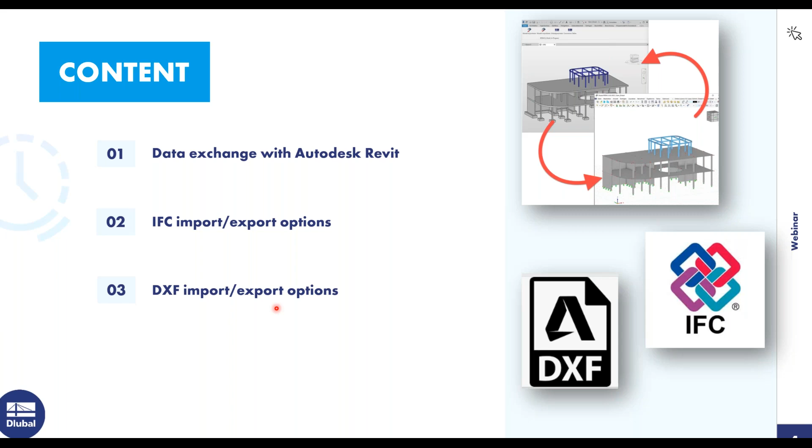So like I said, I would like to start with Revit, but before that, I want to have a closer look at the objects that you can transfer and just some general information on the integration.

Currently we have the interface for Revit 2022, and we're working on Revit 2023. This is planned to be released this month, actually. Both of these releases are set as our named work-in-progress versions, meaning we haven't fully developed all of the features that we want to have yet, but the most important features like the import/export are working for the first release.

The interface itself is still a direct interface, and this is based on web services. So keep in mind, Revit and RFEM must be installed on the same PC, similar to the past. The installation is a little bit different this time, it's a manual installation. Once you install Revit and RFEM on your PC, you'll want to navigate to this folder shown here, and then run this .exe file to install the direct interface.

Currently, this link/transfer requires a web services license, and we plan to make this free in the future. For now, though, if you want to test this out, feel free to get into contact with us, and we will assign you a free web service license to test.

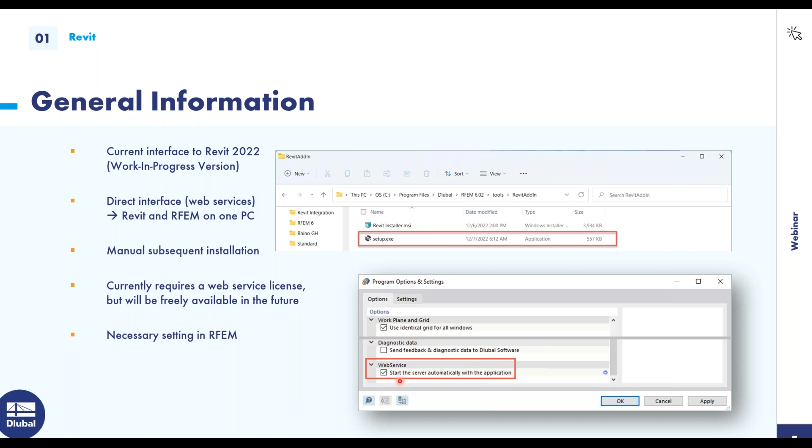Before we go over the interface itself, I wanted to show you the objects in the list here that can be transferred from Revit to RFEM. Some standout ones, for example, are walls and slabs, along with columns and girders (so beams), and then materials and cross sections can be transferred over along with openings. Basically, these objects are all related to the analytical model data.

At the moment, we are lacking or missing some features like loading. So loads we don't have at the moment, they cannot be transferred over yet, but they are under development and should be released soon.

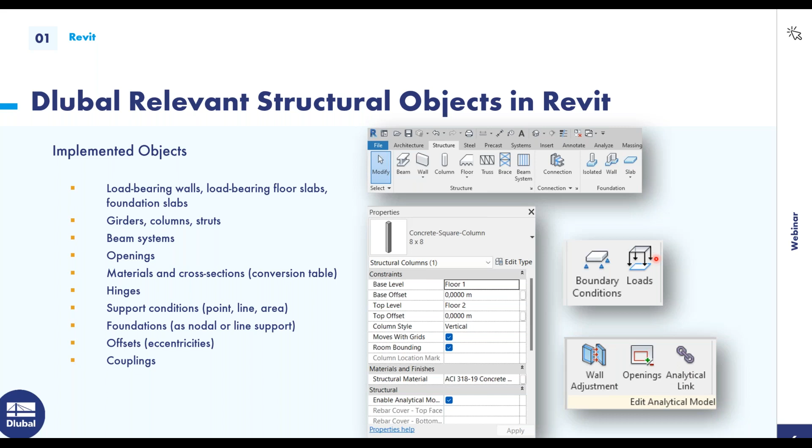Next, I wanted to go over the settings regarding the export. So we can go over those here in the PowerPoint.

The first setting you'll see in this export dialog box is that you can determine the direction of the global z-axis. You can choose to have this set upwards or downwards in RFEM. And then we have some exporting options here.

The first option here is to create a new structure. What this will do is create a whole new blank file in RFEM.

Then you can also choose to overwrite an existing structure, and this will completely delete the structure in RFEM and overwrite it with the structure from Revit.

And lastly, we have update existing structure, and this will just update the items or objects that you've changed in Revit and RFEM. So for example, let's say you first export from Revit to RFEM, and then you modify the structure in RFEM, and then maybe at some point the Revit model gets updated. With this update existing structure option, you can simply update the RFEM model, and there's no need to start all over in RFEM, and then you can save that.

Then there's an additional option here: you can overwrite the member releases, but by default we have this turned off. The reason is because we believe the RFEM hinges or member releases have a higher priority. By default we believe you don't want to overwrite these, simply because we have more options for hinges in RFEM, for example nonlinearities.

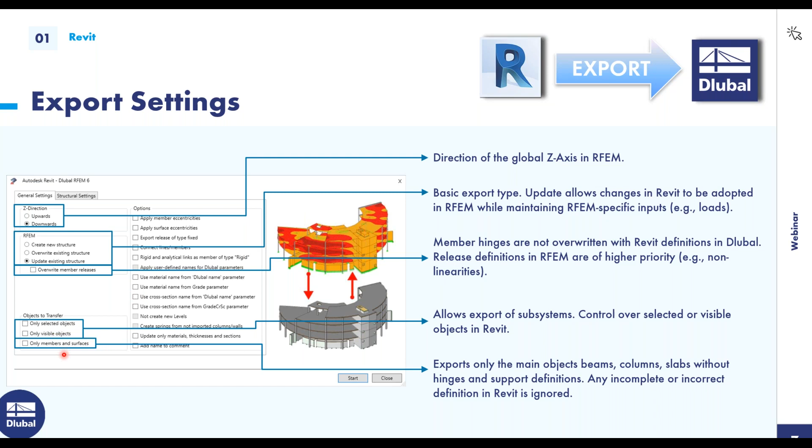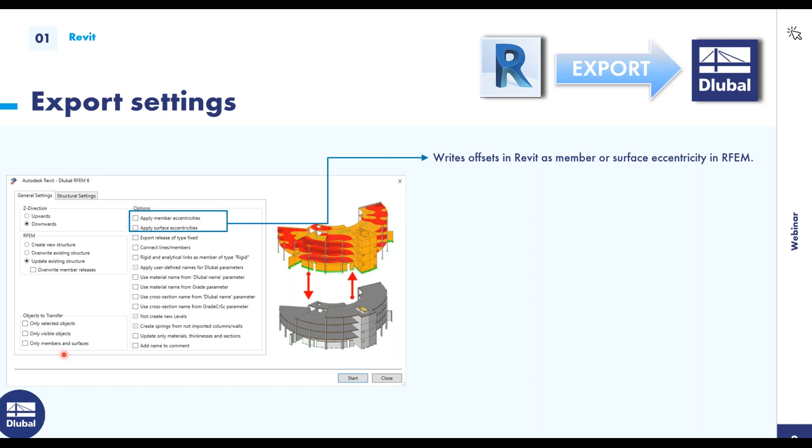Then some more additional options on the right-hand side here. You can choose whether to export member eccentricities or surface eccentricities. Eccentricities are some calculated distance between the analytical line of a beam or slab, and that distance is to the center of gravity of the physical object. So that's what an eccentricity would be in RFEM.

There are some additional options here that I'm not going to go over live today, but feel free to check out the PDF located in the handouts of this webinar, or the recording online, to read through these. The yellow highlighted options are still a work in progress and are not implemented yet.

And then this add name to comment option - basically when you export, the material and cross-section names will be automatically placed in the comments of any element in RFEM.

And then there is a second tab called Structural Settings, and this is the last tab in the export settings. Basically what this does is it allows you to convert isolated foundations into nodal or line supports, or surfaces with elastic foundations. So this will turn your isolated foundations or wall foundations into either nodal supports, line supports, or surfaces with elastic foundations.

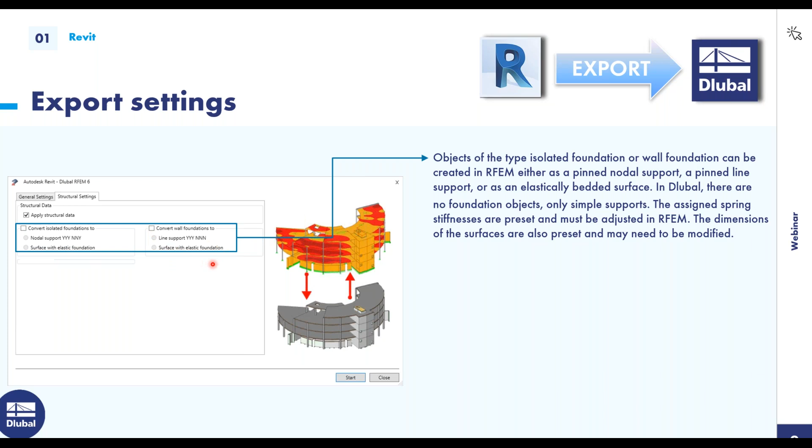Then the next topic is conversion tables. This is a topic that comes up with every exchange between software programs. Materials and section names must be converted between programs because the names don't match up exactly.

With this conversion table, we modified this a bit for RFEM 6 versus RFEM 5. The reason for this is because the conversion tables are now found in Revit itself. You can see this table here shown, and the table is divided between export to RFEM or importing in from RFEM. The left-hand side is for exporting, the right-hand side is for importing.

And then these tables are further divided by material and section. And then they are subdivided further by whether you're using regular expressions or not.

In case you want to use regular expressions, just a little bit of information on these. Regular expressions are like parametric conversions. So for example, instead of mentioning all sections from W shapes, you could write it as a regular expression, and then you don't have to list all of your W shapes - you could simply just write a regular expression for it.

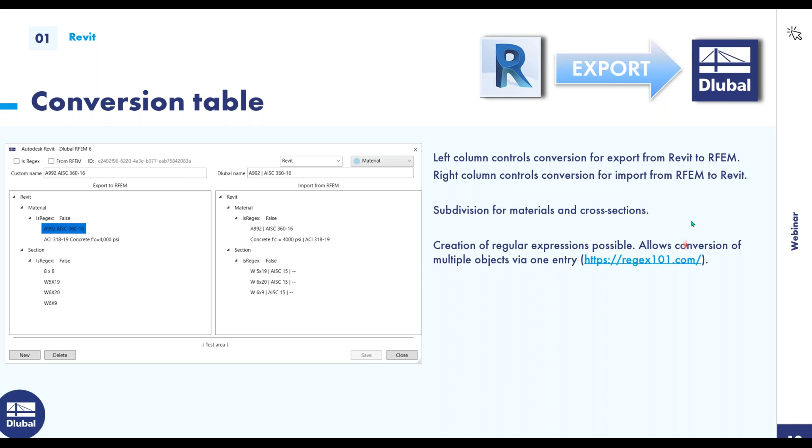The next topic is the Dlubal parameters found in Revit. With this function, you can release or add additional parameters into the analytical properties in Revit. Of the 6 we listed previously, only 2 are currently working. What you can do now is add a parameter for a truss type or tension-only type member into the analytical properties of a column or beam in Revit. This allows you to designate whether a column or beam is a truss or tension member in Revit.

Then during export, this can be read by RFEM and assigned to the corresponding members. In the future, we would like to upgrade this whole feature and give it more attention. We would like to introduce free parameters in Dlubal, which would allow you to assign additional free parameters to beams, surfaces, cross sections, etc. Those parameters could then be shared with Revit, IFC files, or any other application. This isn't implemented yet, but it is planned. So that's the parameters you can use.

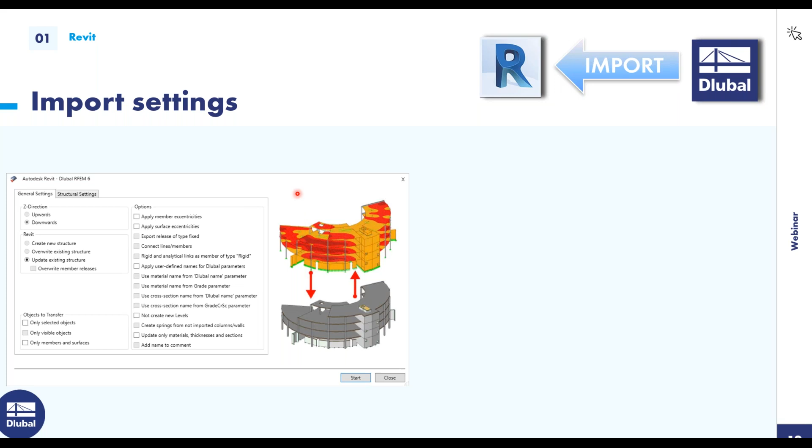The last topic I want to go over before getting into the interface is the import settings. This is the dialog box that pops up if you'd like to import a model from RFEM into Revit, similar to the export settings dialog. We have similar options here. The only option available under the import options is the update existing structure option, so it's only possible to update a Revit project. You cannot overwrite or create a new project.

What this allows you to do is export into RFEM, modify the model there, and then update the Revit project. Another example: you could open an empty Revit project and read all the info in from RFEM or RSTAB, just by updating the project, and you'll get all the information from RFEM or RSTAB. This is only valid if you make sure you have the correct families preloaded into Revit, as we're not able to create new families when importing from RFEM.

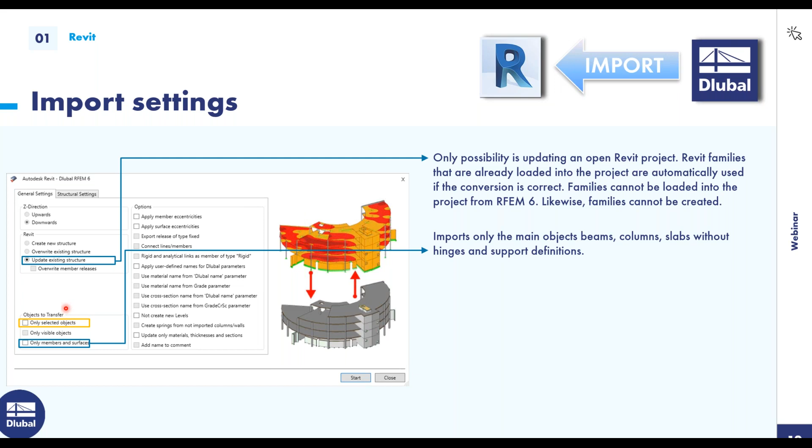There are also some functions for controlling the amount of transfer you do. This would allow you right now to transfer some of the objects. This is still a little under construction, but you do have the option to only transfer members and surfaces if you'd like. We have some other options also under construction, such as eccentricities, which are shown here but not available yet. Of the remaining options, you can check not to create new levels in Revit during the import - that's available. You can also choose to only update materials, thicknesses, and sections, which is sometimes a safer way of updating projects.

That is it regarding the theoretical point of view of the interface. Now I'd like to take a look at the actual interface itself. So what we can do is move over to Revit, and here you should see I have an example open in Revit at the moment.

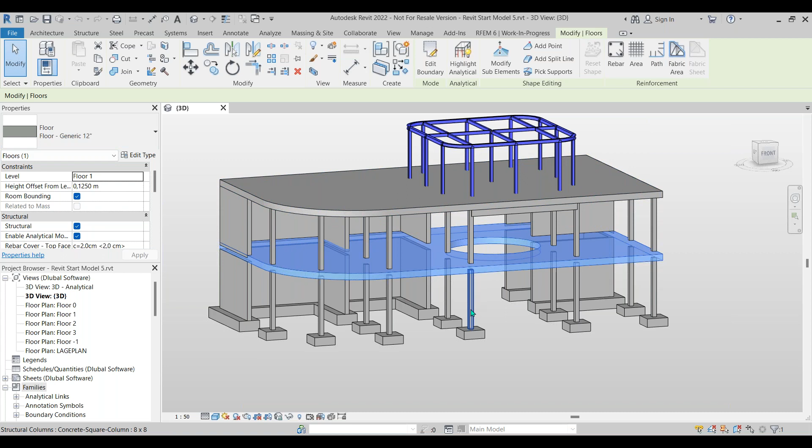This is a project I previously put together. You can see it is a mixed structure of concrete and steel, maybe some small offices. We have concrete walls that are 8 inches, concrete slabs about 12 inches with an opening, and concrete columns that are 8 by 8. Then we have this smaller steel structure on top using W sections. So this is a physical representation of the project.

What I'm more interested in is the analytical model, because that is what's going to be transferred into RFEM. You may be asking, how do I get this analytical model in Revit? You can get the analytical model by checking an option. If I click on one of my elements, let's say my concrete square column, you can go to the structural properties in this panel, and scrolling down you'll find the option to check that says enable analytical model.

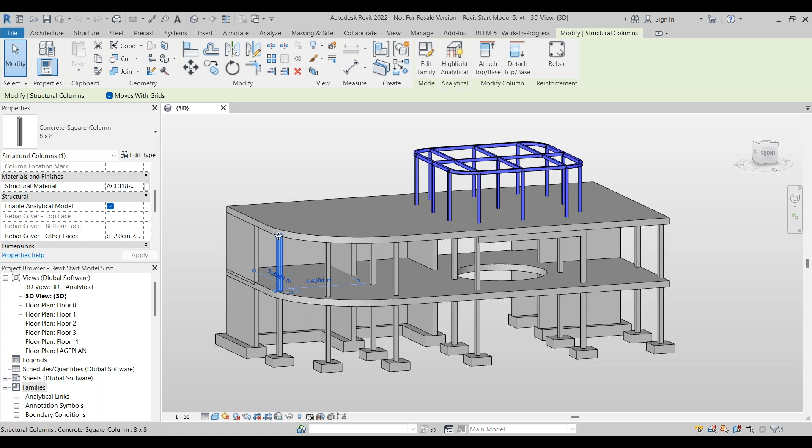If you activate this option, which I've done for all the elements here, Revit will convert the 3D objects into lines for columns and beams, and 2D objects for slabs.

If I'm converting my column into a simple center line that goes up the center of gravity of the column, and then a 2D object for my slab here which goes at the halfway point of the thickness, then naturally there's going to be a gap between these two lines. So what Revit is doing is not only converting these objects into surfaces and lines, it's also connecting this gap afterward.

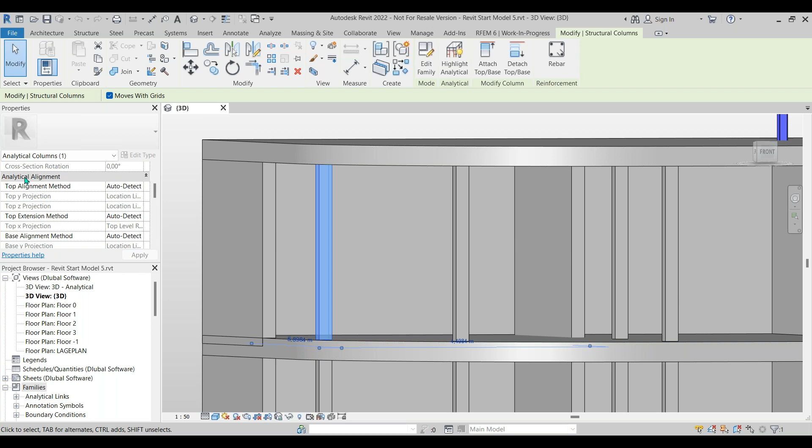If I click on my column and change it to my analytical properties, scrolling down you can see the analytical alignment settings are all set to auto detect. This is how Revit automatically detects that connection. There's also another option in the dropdown - if you hit projection, you can manually set a level for how much you want to shrink or elongate the member or column.

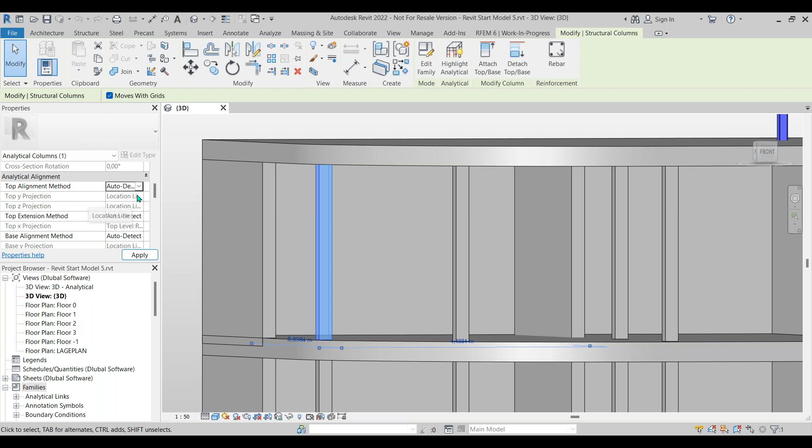This was all done for me already previously. So what I can do now is double click on the analytical 3D model here, and this is basically what our Revit does. You can see if I rotate the model that all of my columns are connected to my surface and they're all in the correct plane. So lines and surfaces are all connected in the same plane. My downstand beams are projected into the plane of the slab here, which is required for RFEM.

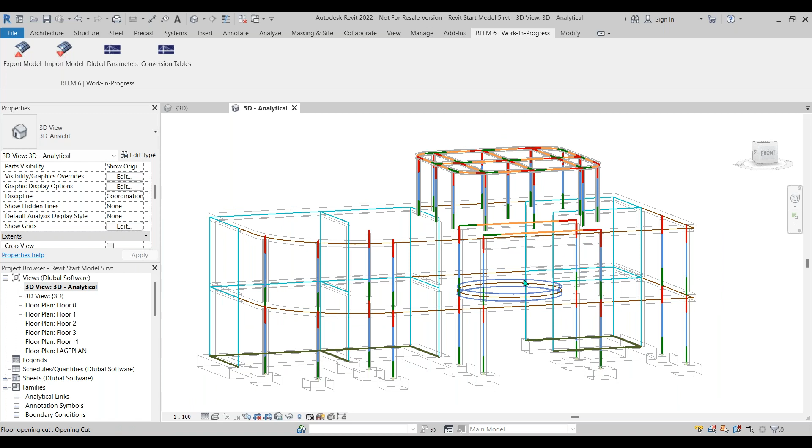This is the model that's going to be exported to RFEM, and this is what the interface or plugin refers to. If you installed the plugin correctly after installing Revit and RFEM, you should see this tab up here called RFEM 6 Work in Progress, and that'll give you these 4 icons here.

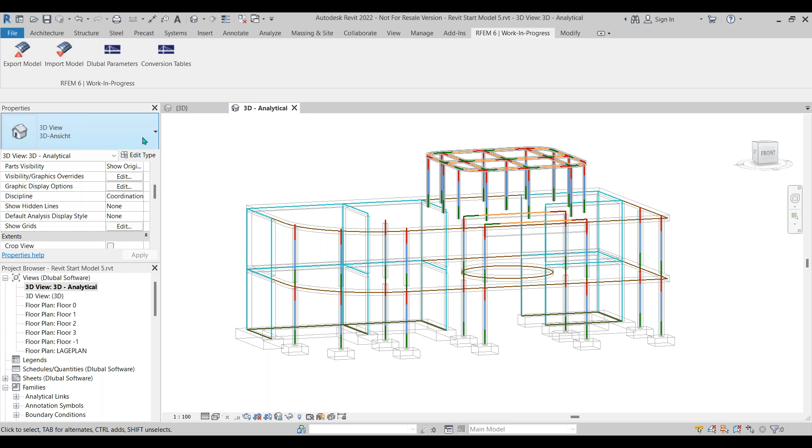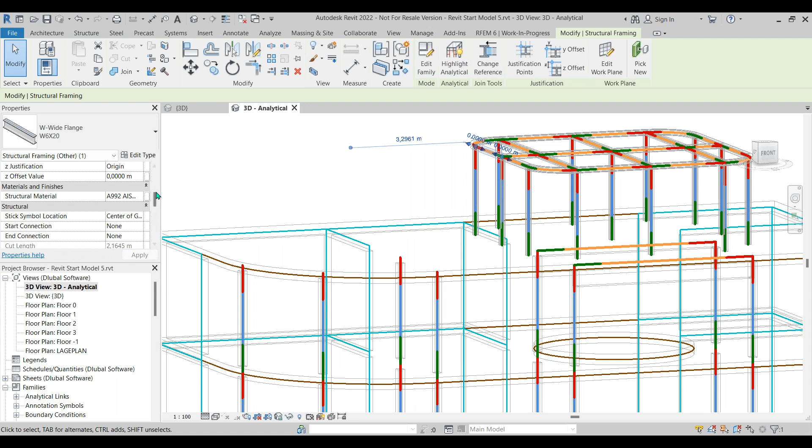Before running the export, I would like to check my conversion tables. Before doing that, let's look at some of the names I have for my objects. For example, I have a W wide flange, and the name is W6 by 20. I can also change this and go into my properties, where I have my material set under my structural material properties. If I open up the material library, you can see the name - I'm using steel A992 according to the AISC 360-16.

So this is the naming convention that RFEM is not quite aware of. There are different or specific names used in RFEM that are slightly different. So what we have to make sure, using the conversion tables, is that RFEM reads these names correctly. This is done in the conversion tables.

If I click on conversion tables, this is what I showed previously in the PowerPoint. On the left-hand side I have my materials and sections for exporting to RFEM, and on the right-hand side I have my materials and sections for importing in from RFEM. So you're maybe asking, how do I add a new entry? To add a new entry, go down here and click the new button.

Then you want to decide if the conversion is going to use regular expressions or not - I'm not going to use regular expressions, so I won't check this box. Then, is it related to the export? If so, I'm not going to click on from RFEM. Then we want to hit this dropdown, and it's going to be part of Revit. Then we need to decide if we're using a material or a section - I'm going to choose material for now.

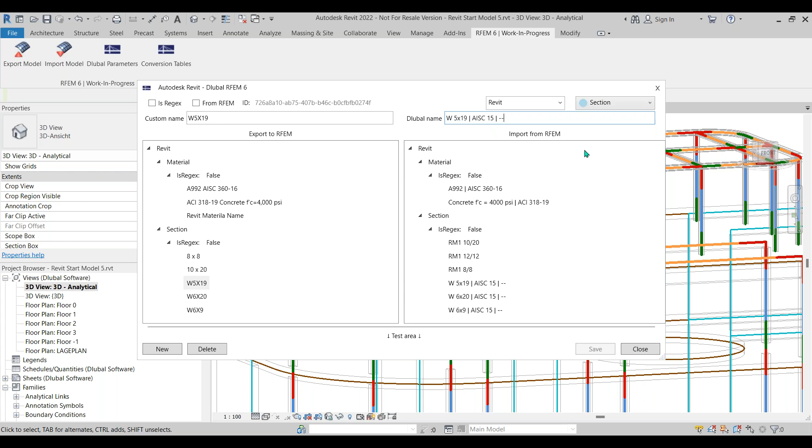Now what we can do is run the export. I'm going to close the conversion table, and then before exporting, we want to click on Export Model. Then you'll see the export settings dialog box pop up.

We can choose the Z direction, so I'm going to keep that as upward. Then I'm going to choose to overwrite an existing structure, as I have a blank model open currently in RFEM. I also want to apply my member eccentricities, and I'll have that checked on, which is relevant for the downstand beams that are dropped below my concrete surfaces.

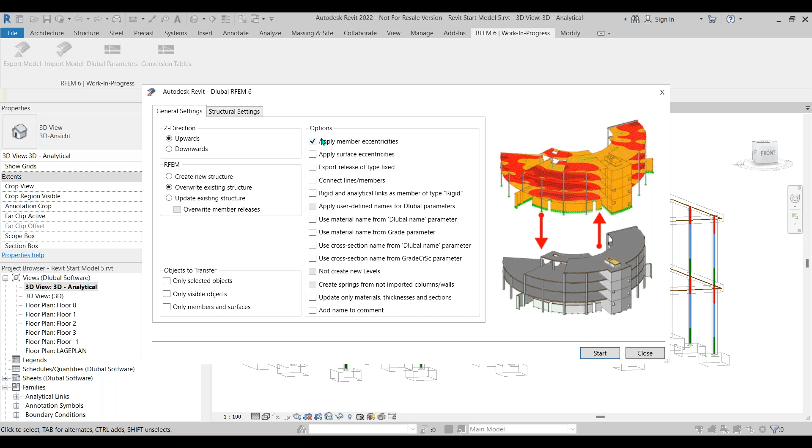In the second structural settings tab, I want to convert my isolated foundations into nodal supports. These are the foundations under my columns. And I want to convert my wall foundations, shown here under my walls, into line supports.

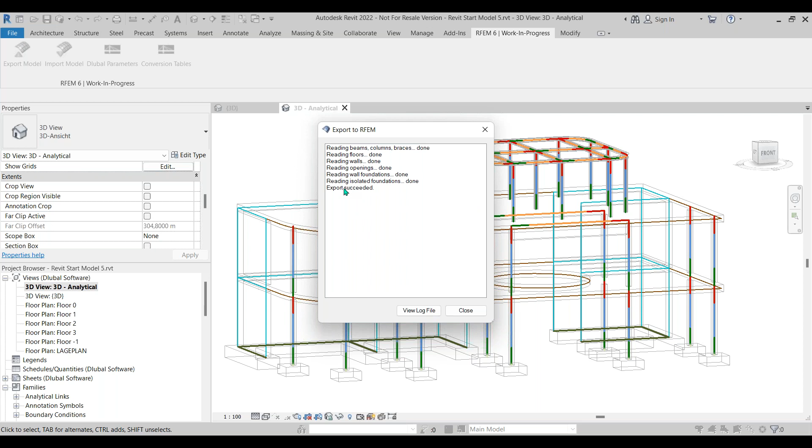Once that's done, I can click start, and then the export will begin. Revit will communicate with RFEM using web services and transfer all of the data directly into RFEM. The transfer will end once the export says succeeded. Now we can close this box, and then switch back over and open up RFEM.

Now you should see in RFEM the model that was exported over. It looks really good, you can see the model here. My concrete and material properties have transferred over.

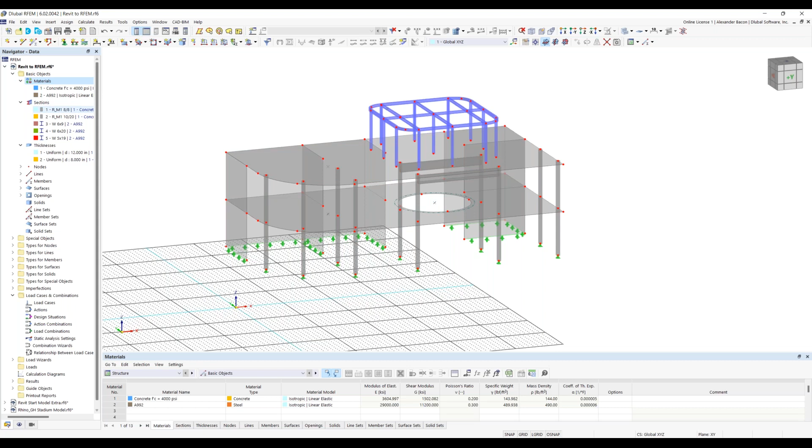I can look in the project navigator on the left-hand side under my materials, sections, and thicknesses, and we can see all of my materials, sections, and thicknesses have all transferred over properly, which is good.

Now what we could do is continue modeling this structure by creating loads and load combinations in RFEM and designing the structure. But this is something I'm not going to show for today.

I will give an example of, let's say, maybe we have to modify the model here because some beams are missing at the top, or maybe we have to increase some sections because they don't meet the design. So let's say we have to add some beams up here.

We're missing some beams, so if I hold Control and select all of my beams, I can hold Control and then use the drag and drop feature to move those beams over, and model my additional beams there.

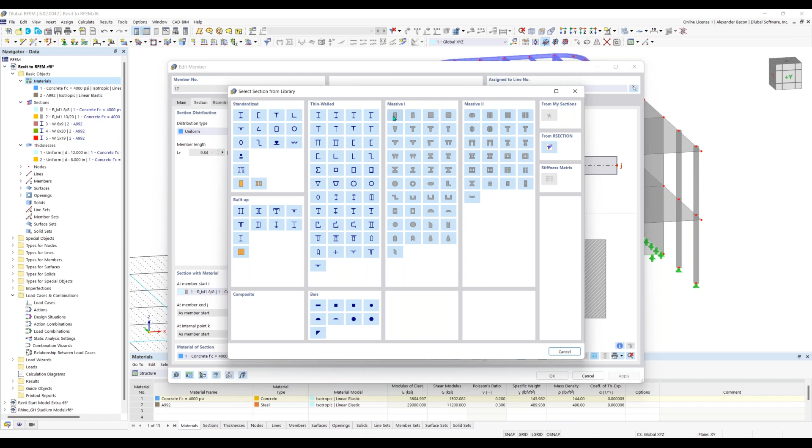Then let's say we have to increase the size of our columns. I'm just going to increase the size of this one by double clicking on it to edit it. Then I can go to section, open up our section library, and create a new section. I'm going to choose massive rectangular.

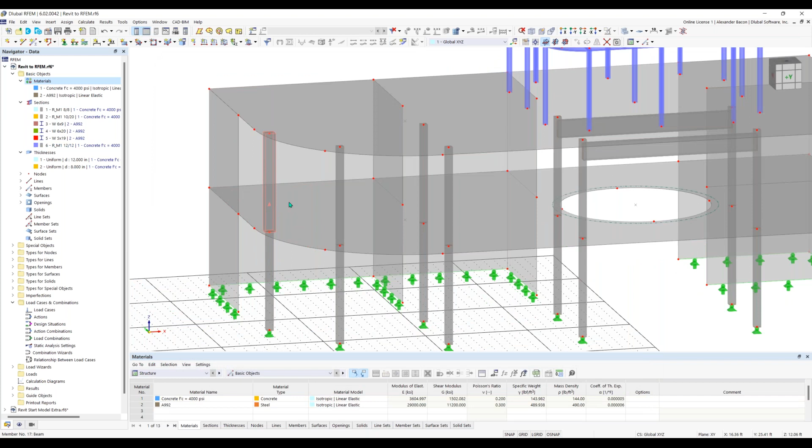Let's say we had to go from 8 by 8 to 12 by 12. I'm going to click OK and make sure my material is set to concrete, 4,000 PSI according to the ACI, for example. I'll click OK. Now we've increased the size of this section and added some beams.

Now let's say we need to update the Revit structure. So if I open Revit back up and need to update this structure, I can simply go back to the graphical view, and then go to import model.

Now we have to choose update existing structure. We can keep that applied, and then we can hit import or start.

Once that begins, sometimes you might have to assign the families again to some of the cross sections for RFEM. This won't be the case in the future because we will be optimizing this functionality, so you won't have to do this. But all you need to do is, for example, for my concrete columns, it's not assigning the families.

So I can go in here and choose 8 by 8, and then we have our 12 by 12 here. I can click apply, and that will be done automatically if the families are preloaded correctly in the future.

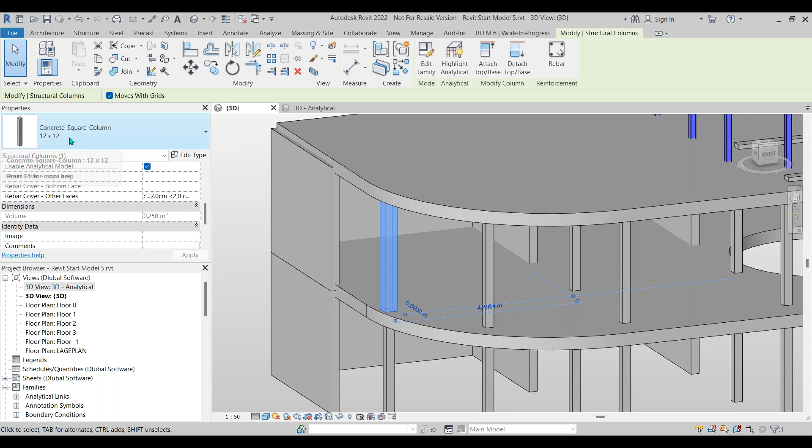Now we can see our new beams up here have been added to the steel structure, and also our column here, the section is updated to 12 by 12. So that is one way of importing.

Another way of importing a model is maybe you just have a totally blank Revit file and you want to bring in everything from RFEM. This would be the exact same way.

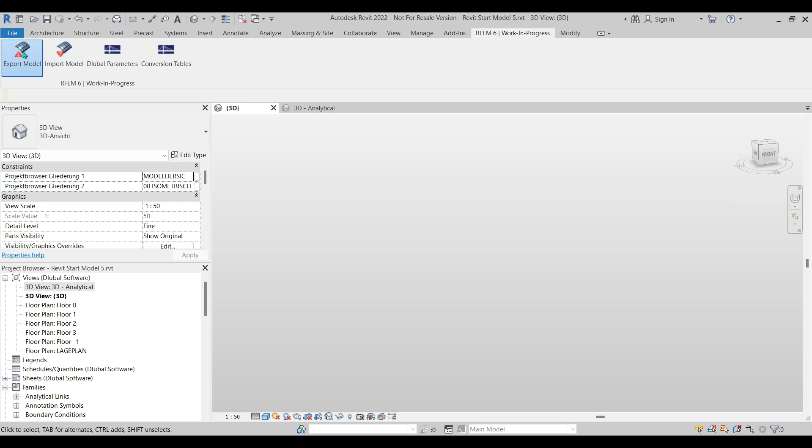You could import the model and choose all of the exact same options, hit start, and make sure all of the families are preloaded, and all of your conversion tables are set up. Then you just have to sometimes select the corresponding families, hit apply, and then that import will go through, and RFEM will simply load in all of the info into Revit.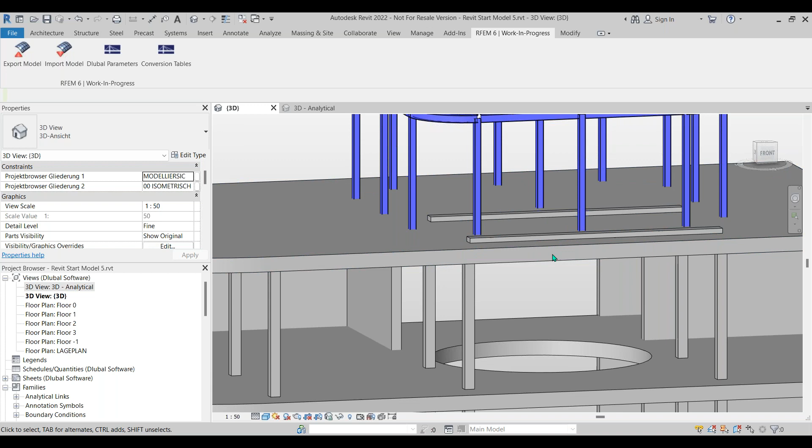As I mentioned before, the eccentricities are not supported at the moment, as you can see when importing, but we are working on optimizing and implementing this for the future. At the moment, the beams are just connecting to the bottom of our slab here.

Now I would like to switch back to the PowerPoint. That's everything regarding the interface between Revit and RFEM. So now we can move into some general information on the data exchange for IFC formats.

Regarding the import for IFC, we support two versions: IFC 2x3 and IFC 4. IFC 4 is new in RFEM 6, and we also can import the structural analysis view along with the coordination or reference view.

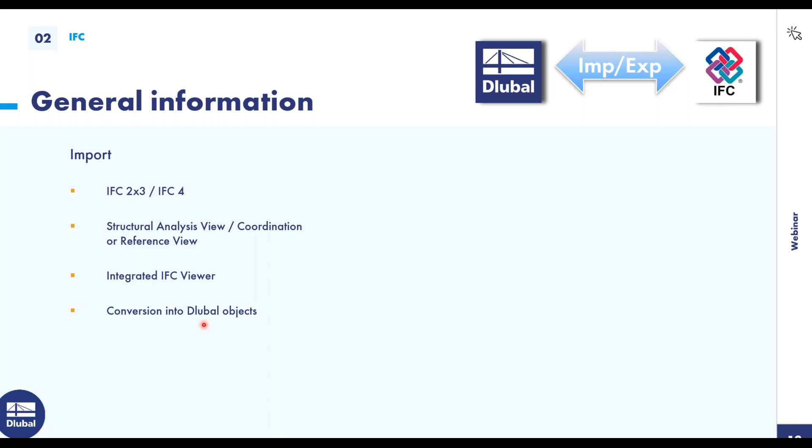We also have an integrated IFC viewer. This is something we had in the past, and it allows you to display the content in RFEM as graphical objects. Lastly, we have the option to convert graphical objects into native Dlubal objects. For example, this may include an IFC beam being converted into an RFEM member, which is pretty handy.

Regarding the export, at the moment we only support exporting IFC 4 from RFEM. We can export the structural analysis view along with the reference view, and exporting the reference view is actually something new in RFEM 6. So now you can export your model into the common IFC format reference view.

What that allows you to do is open the files in any CAD software, for example Revit, Tekla, or IFC viewers. In the past, we only had the structural analysis view as an option. So now we can go over the workflow of this in RFEM.

I'm just going to open a new RFEM model, create a new model, and name this IFC format import. I'll click OK. Then I also wanted to open an IFC file that I had previously in the BIM viewer.

This model was the same model that was in Revit. I just exported it as an IFC file, and it's basically the exact same thing. We have our steel structure on the top, and it's made out of the remaining concrete structure on the bottom.

What's nice with IFC formats is you can take a look on the right-hand side at all of the information regarding cross-section and material necessary for an analytical model, all transferred over here. For this W-shaped beam, we have a W5x19 along with the material, A992 steel. This is also done for the columns, the slabs, and everything.

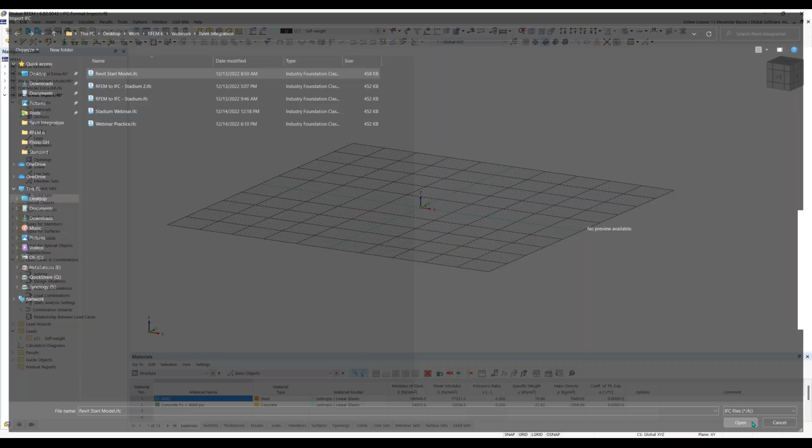So let's say we have this IFC model and we want to open or import it into RFEM and create a structural or analytical model. I'm going to go back to RFEM, and once in RFEM with a new file created, you can go to File, Import, and choose IFC. Then we simply choose the IFC file, click Open, and RFEM detects that it is a reference view automatically, activating the integrated IFC viewer, and this small dialog box will pop up.

What we can do here is change the insert point of the IFC file. You can either do that by manually entering the X, Y, and Z coordinates for the global axes, or choose it graphically. I'm just going to put it at the origin. You can also rotate the model about the axes here, along with switching the coordinates or mirroring them as well.

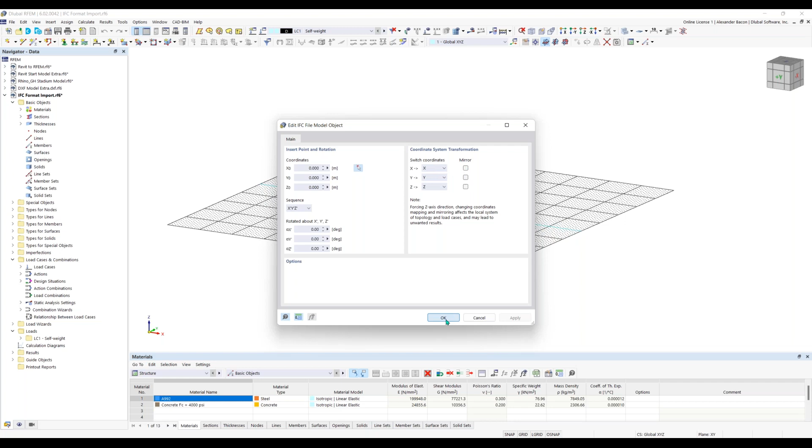So now, once we click OK, we can click OK again, and now we can see that my IFC model has been imported. I can turn off my grid here, and we're able to use the integrated IFC viewer. You can tell we're using the IFC viewer because now we have an additional tab here, IFC, in the navigator on the left-hand side.

We're able to turn on and off the slabs here, so there are some visibility types automatically created. We can turn on and off the visibility of the columns along with the footings. So you have some options for visibilities, and you can also get further into detail with visibility.

You can turn off specific columns, beams, and footings. If we click on one of these objects, let's say we click on a beam here, one of my steel beams, I can turn on my object properties. On the right-hand side, I'll get my basic IFC properties, and the information for the analytical model was carried over from the IFC file.

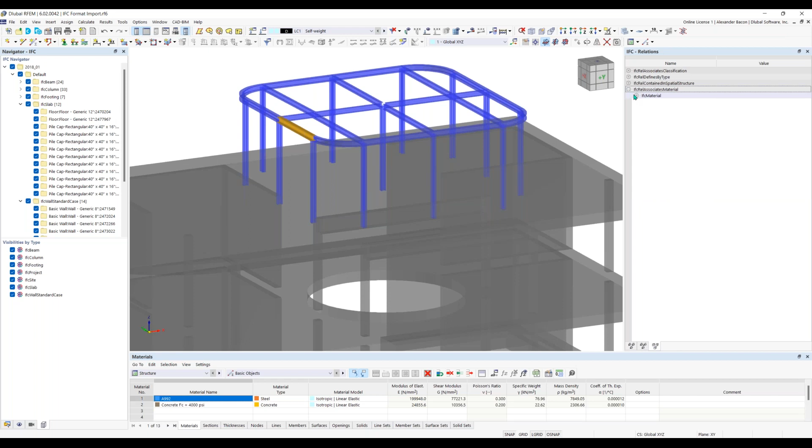So you can see I have my cross-section name here. And if I go to my third tab here, I can hit this drop down and you can see that the material name has also been carried over.

So now we can use this model for the manual creation of our nodes and lines if we want to. That's the first method. What we can do is use what's called object snap, which is built into RFEM. If we right click on OSnap down here, we have our object snap settings.

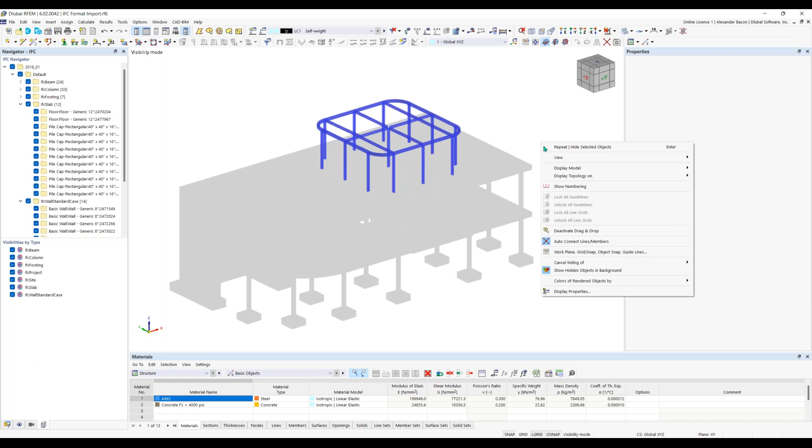With these turned on, we can basically draw our center lines and members on our structure here. I'm just going to do a small portion of the structure for an example. I'll highlight the bottom portion here and hide these selected objects, then turn off the hidden objects in the background. Let's just focus on the steel portion here.

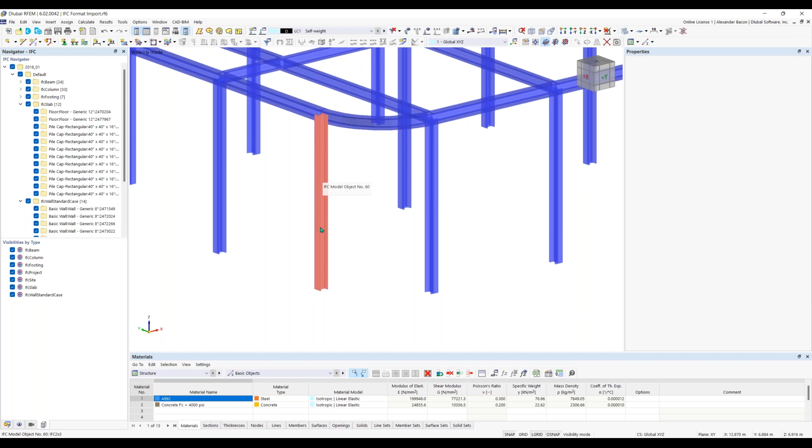Let's say we want to model this steel portion. The first option would be to simply use this column as an example. Right now it's just an IFC object, but we want to convert it into a deliverable RFEM member. So we can turn this into a wireframe view, and then we need to use the tool up here to create some nodes at the center of gravity of this column so that we can draw our line.

So we want to use the tool here between 2 points. Once that tool pops up, I can simply snap to one corner of my column cross section and then the other one, and click apply. Now we have a node placed at the center of gravity of this column. We want to do this for the top as well. Click apply. Then we want to connect these nodes here with a line.

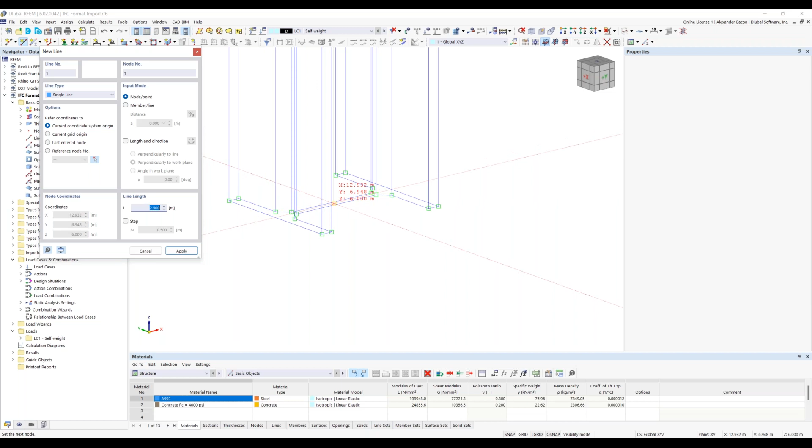I can simply select my node here at the center, and then snap to the bottom here, right click to cancel out. Now we have our analytical center line for this column.

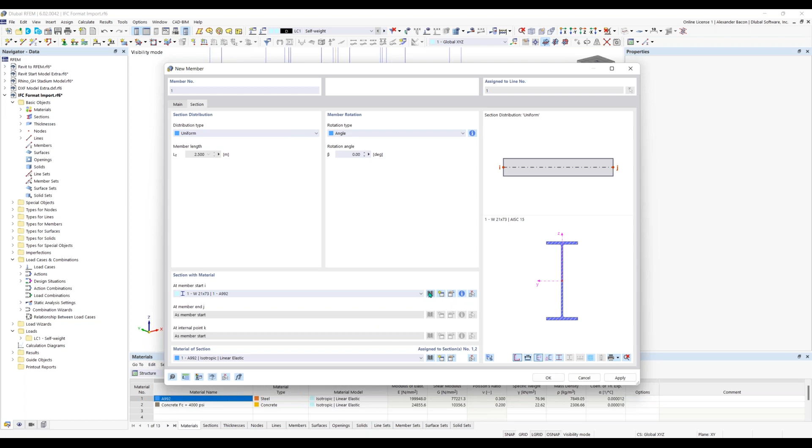I would want to double click on this line, go to member, and then under member here, I can create a new member, go to section, and assign a cross section and a material to this line. I can import this from our section library, so I would want to open up the section library.

We have our standardized sections here, our W shapes, so I can choose those. I filter to the AISC 15, go to W shapes. This specific W shape is a 5x19.

I'll scroll down to 5x19, and then I can choose the material, say steel A992 - you can get any material from the material library here. Click OK again and again. Now if I change this to a solid view, you can see that my column here is created, and I can actually use this for my analytical model.

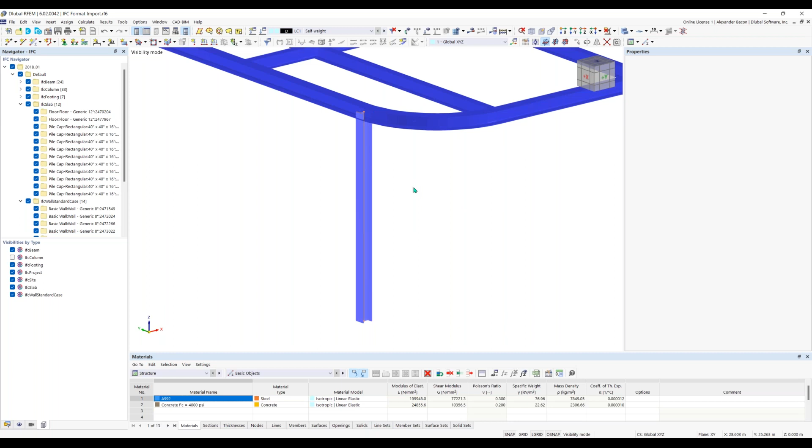So that's one way - this is how you can turn IFC objects into RFEM objects, and it might be a lot of manual work, but for this file, you could definitely do it depending on the size of your file. So that's one way of turning your IFC reference view file into an analytical file in RFEM.

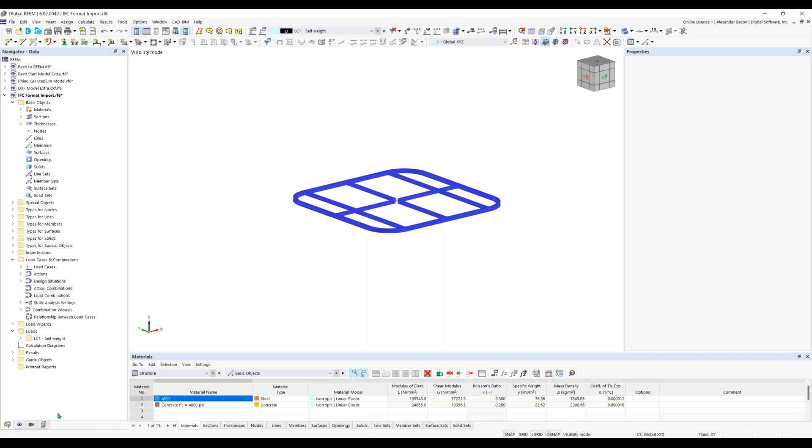There is another method you can do. If you right click on an IFC object, you'll see that there are a couple of options for converting it - you can convert it either into a straight member, a curved member, or convert it into a surface or solid.

Before you do this, you should check your conversion tables in RFEM. So if we go up here to our conversion tables, we want to go to CAD, the CAD BIM menu, and then open our conversion tables.

So we have a conversion table in RFEM, and here you can see my materials tab. When you import an IFC file, we try to insert the material and section names into these tables automatically. All of these names and sections from the IFC file will be inserted automatically on the left-hand side, but what you have to do is make sure to assign the correct deliverable material.

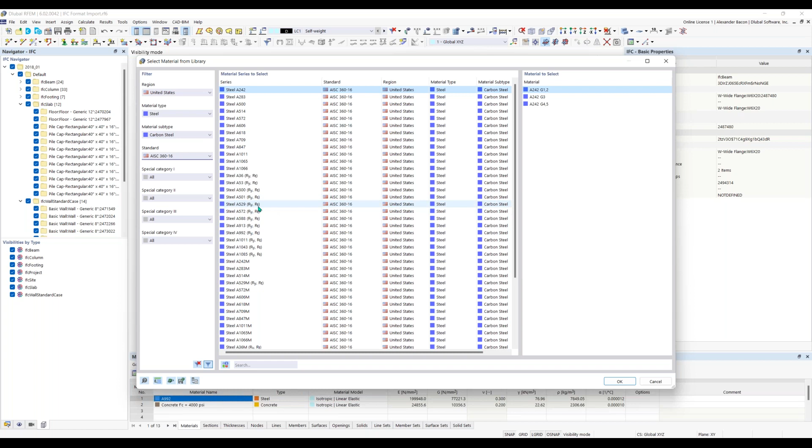It's very easy. I already did this for my materials, but you can simply click on this edit material button, then filter to the material you would like. For example, this was steel A992, so we would filter to steel A992, click OK, and that material name will be inserted here automatically.

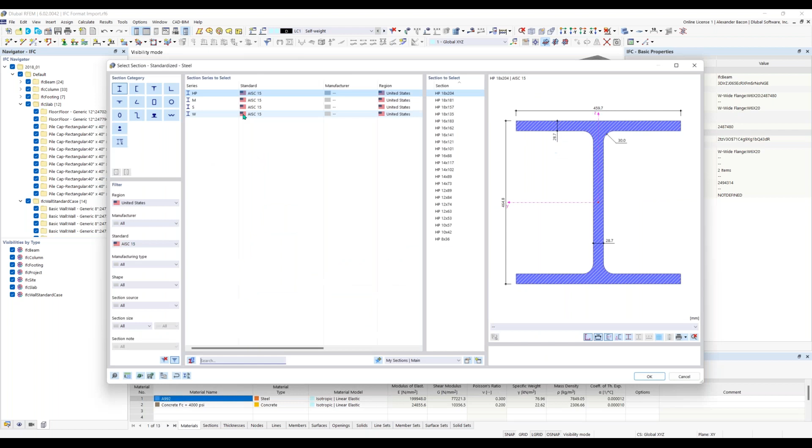I will do this for my sections now. All I need to do is my flanges, my W shapes, were entered automatically for me. So I have my W6x9 here, and I would just click on this button, go to my W shapes, scroll all the way down to my 6x9s, and click OK. Then you can see the correct name has been entered.

Then what I can do is simply hit F8 for the cell below. So we can go to the next cell, hit F8, then hit F8 again, and fill out these rows.

And then for these, instead of having to go through the material library, we can simply just edit them. So I can change this to 5x19, like that. Now we have our cross sections entered for the steel structure behind this window. I can click OK, and now we can convert our objects here properly.

So you can do this for one single member. I can right click on this member, convert it into a straight member, and now you can see it's converted.

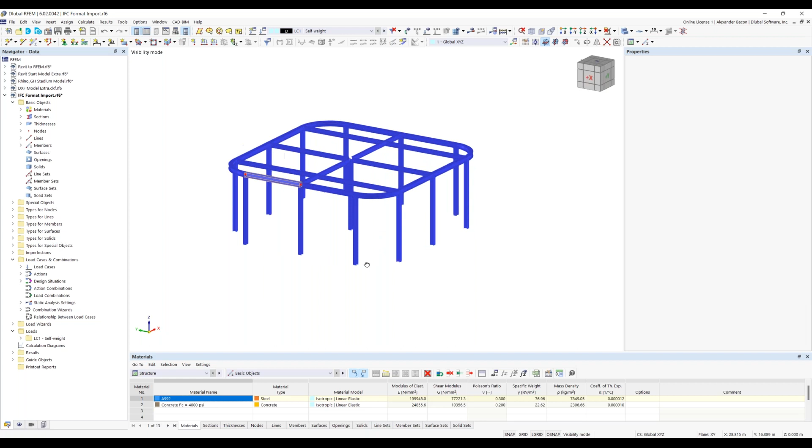Or what you can do is highlight multiple members. If I hold Control, I can highlight all of my straight members first, get all my columns, then right click, go to IFC model object, and convert into straight members. Once you do that, when you go to edit them, you'll see that the section cross sections have been assigned to the member along with the material.

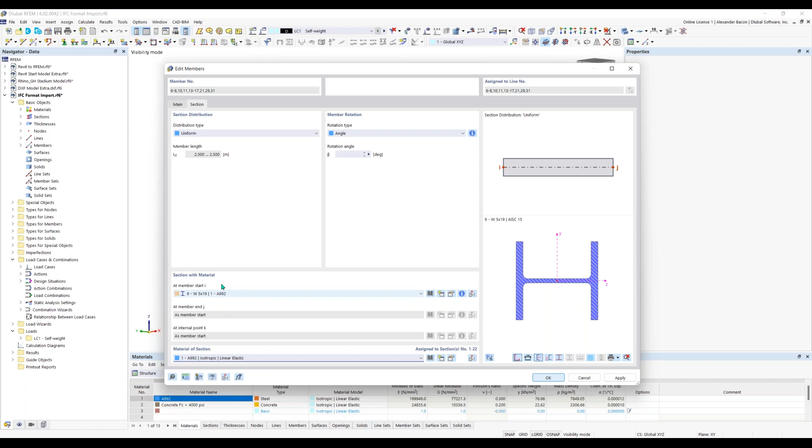So we have steel A992 and the correct sections. If I click OK, the last thing we need to do is do this for our curved members as well. So I can go around holding Control, selecting my curved members, right clicking on them, and converting them into curved members.

So yeah, this looks great at first, but what we want to do is check on the wireframe. If I turn this into a wireframe view, unfortunately you can see that a lot of the nodes are not actually connected here. The reason for this is because there are gaps between the beam, as the beam is going to end at the flange.

This is basically because of the conversion from the IFC file. If we go back to BIM Vision and zoom in here, you can see that the beam ends at the flange of the column. Unfortunately, our analytical model is also going to follow this same layout. So this is something the user is going to have to do manually, connecting these back. We don't have any autonomous features that can connect these lines afterwards, but this is doable, at least for this model.

And we do have some tools that can help with this. So what we can do is simply select our beams here, like so, and go around and select them.

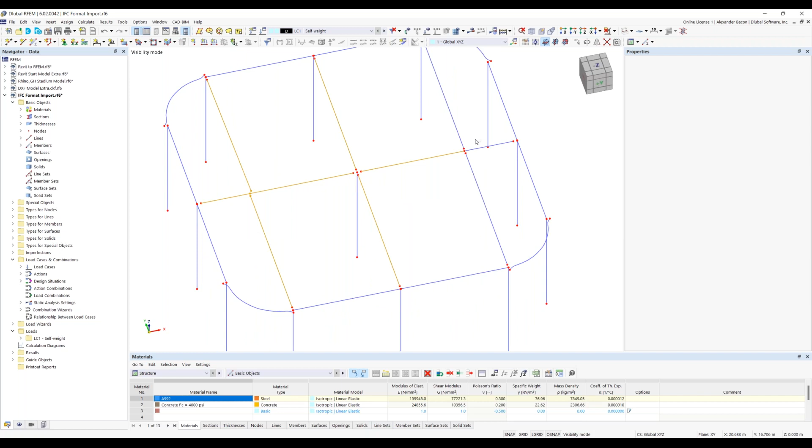Right click on them, go to members, and one of the really nice tools to get these all connected again is if we choose the extend member option, and under extend through we hit to next member/line. We click OK, and now all of our lines here are connected.

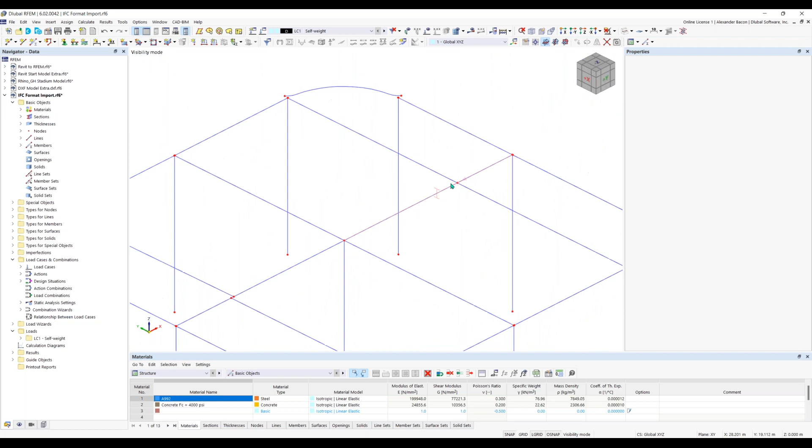So all of our beams here have been connected, you can see they're all connected. Then we would have to go around to our corners here and use our drag and drop feature to connect our curved members here, like so. We'd also want to make sure our surrounding girders here are connected to our columns.

So there's just a little bit of cleanup work when it comes to that type of conversion for IFC. You would have to do this for the remaining four corners, and also our beams on the outside. But after doing this, you'll have a clean converted IFC file. This is something you'll have to do if you don't want those eccentricities. It's a bit of manual work, but you get an analytical model out of an IFC file.

So that's how importing IFC files works and how you can get an analytical file. One thing to mention: we are possibly collaborating with another software company to automatically get these analytical models and optimize this conversion further. This is still in development, but we plan on sharing more information as soon as that's ready.

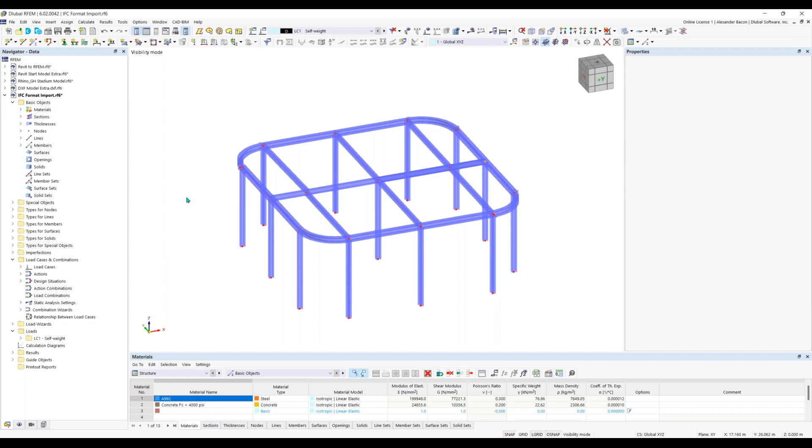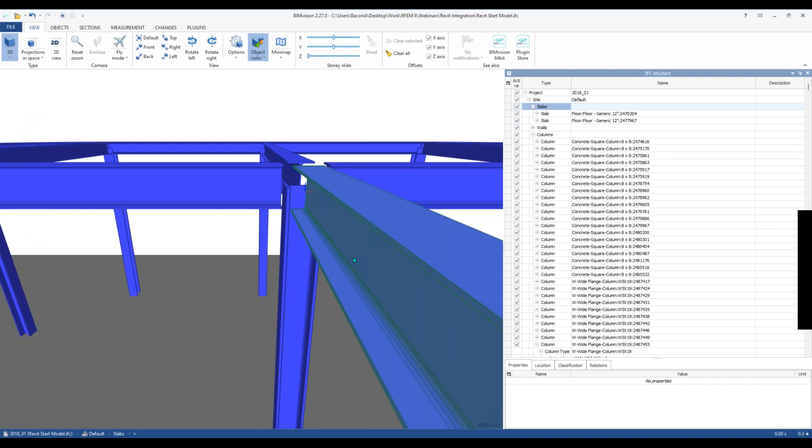So if you choose IFC, you can give it a name, and then choose between a type here. You can export it either as a reference view, which is new in RFEM 6, or export it as a structural analysis view.

Once you do that and save the file, you're able to open it in any BIM viewer like Tekla or Revit, and get all of the content and info from RFEM. So if I go back to my BIM viewer here, all of the info from Revit or RFEM has been exported. If I click on my column here, for example, we can see the column on the right-hand side.

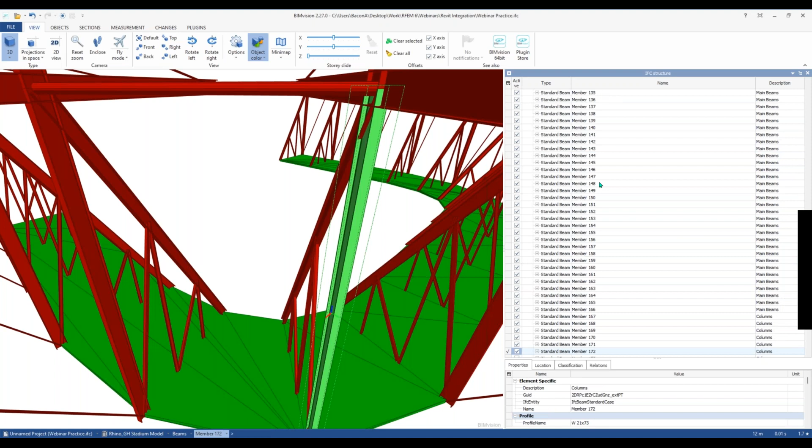The correct beam here was opened up. So let's see, if I click on one, you can see I have my material here along with the cross-section name at the bottom. So you'll get all of the analytical properties that you need, material and cross-section, inside of the IFC file.

So that's basically how you can export an IFC file, and like I said, you get all of the required info for an analytical model.

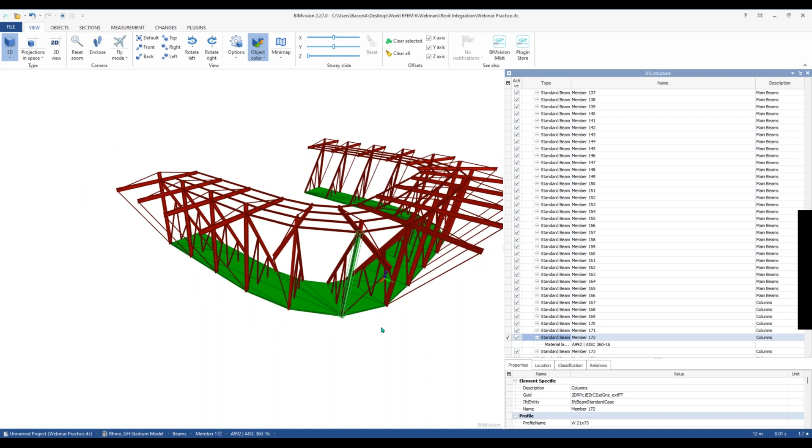So now let's go back to the PowerPoint, as I'd like to move into the last section of this webinar, which is all about the DXF template or format. Before going into the actual interface or the steps on how to import or export a DXF file, I'd like to go over some general information on DXF.

There are two options for importing a DXF file: you can either use the direct import for AutoCAD, or import the DXF file itself. Both have the same functions. There's also an option for importing specific layers — this is something RFEM 5 had, but now we've optimized it, so you can select multiple layers instead of just one as before.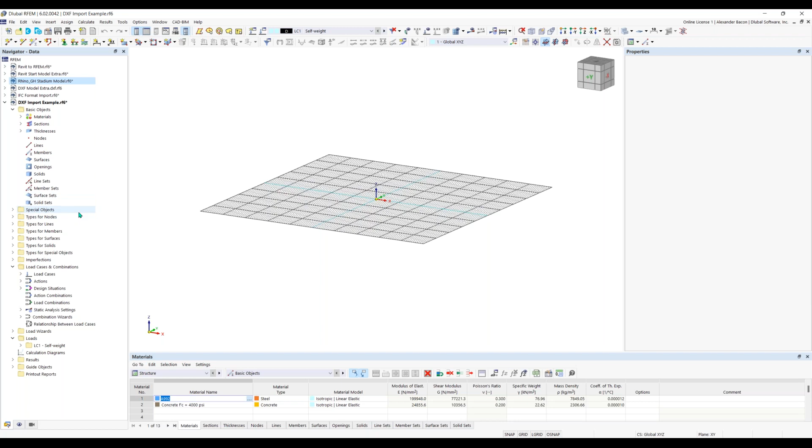First I would like to show you how to import a background layer from a DXF file. This has changed a little bit. We can import this using guide objects, found in the navigator on the left-hand side. We want to go down to the folder guide objects, and then you can find the background layers.

We want to right-click on background layers and choose new background layer. Once that opens up, you'll see this dialog box. The first thing we want to do is import our DXF file, so I'll click on that button and locate my DXF file locally on my computer and hit open.

There are some additional settings here. I'd like to point out the insertion point. This is the point at which the model will be sitting on the origin, so that will be the center. There are some other options here.

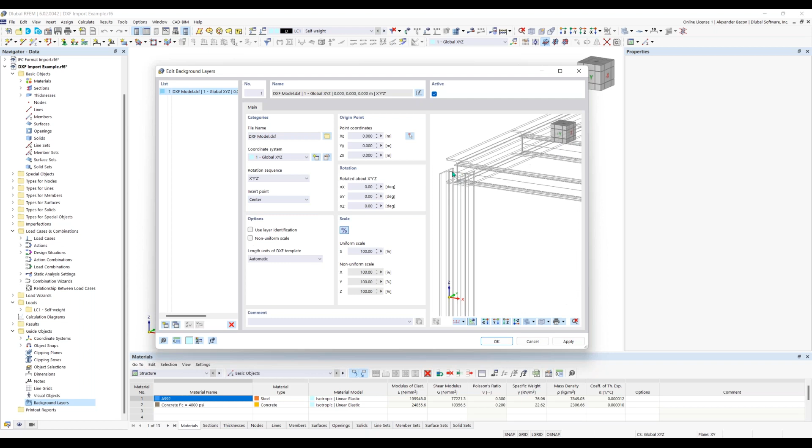We would like to optimize this a little bit further and improve on it. At some point you can just snap to a point on the DXF file here in the graphical view, and that will be your insertion point. Hopefully that'll be in there graphically soon. Then you can choose your origin point in RFEM, entering it manually, or use this button to choose it graphically.

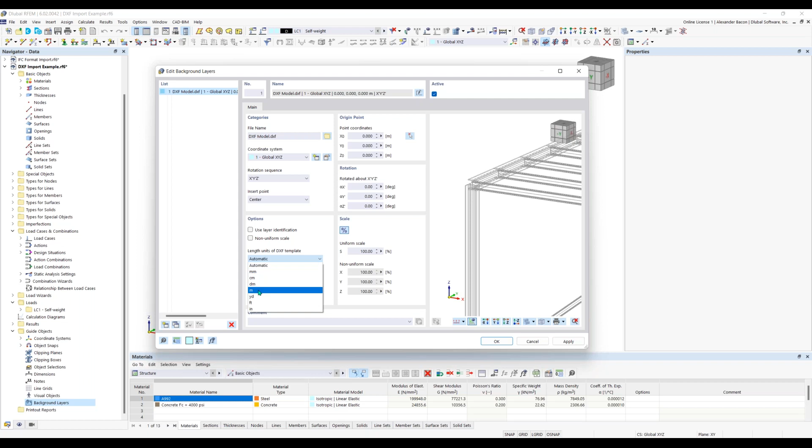Then there are some scaling options here, and lastly, you can choose your units. You can set this to automatic, or if you know the units, you can choose them. I'm going to choose metric, as this model was originally modeled in metric.

At the top here, you can activate or deactivate background layers. This is helpful if you have something like a multi-story building with multiple background layers listed here, and you want to deactivate or activate them.

Now we can use these background layers to model this. This is similar logic to the IFC file that I showed. I'll just do an example real quick. We can draw a line, a center line again. I'm going to use this column again as an example, so I can zoom in here.

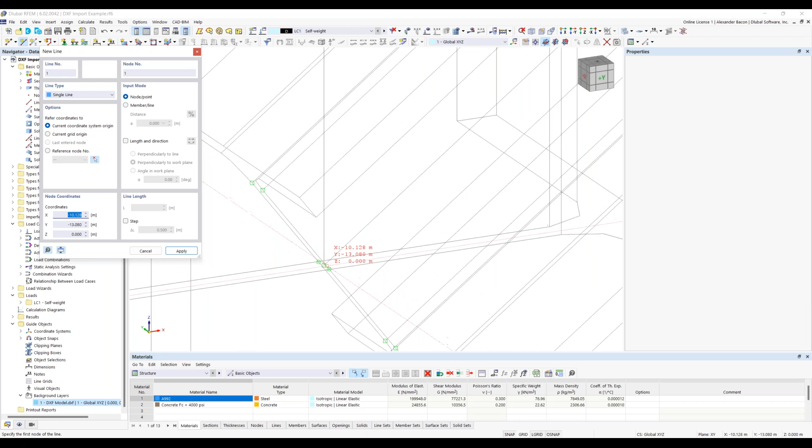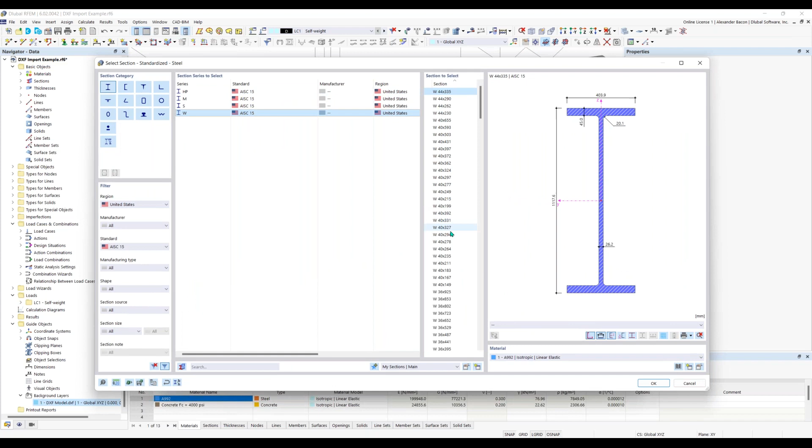I'll snap to this point if you have your object snap settings turned on, then go to the top here and snap to this point, right click, and double click on the center line, check the member option to turn this line into a member, go to section, then quickly go to W shapes, scroll down, and this will be an 8 by 35.

Click OK. I have steel A992 assigned. I can click OK again and again, and now you can see I have my W shape here created.

So this is one method for modeling in a background layer. You can just add in the center lines and then assign the corresponding cross-section and material. That's one way. Another method is to import these lines directly, so I'm going to clear this out and show you how to import the lines directly.

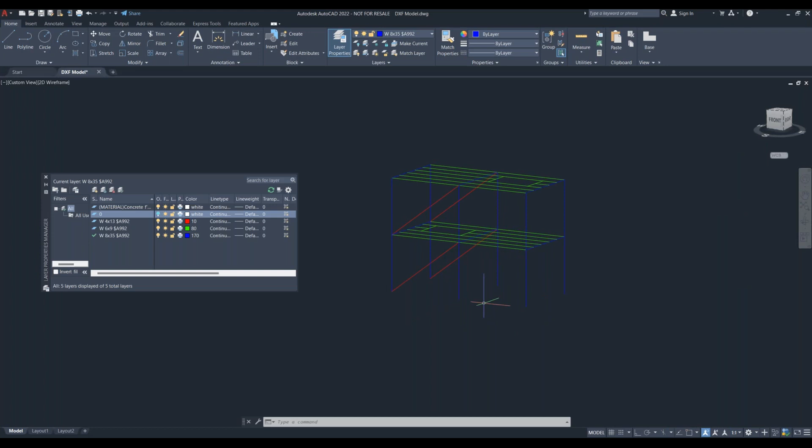To do this, I'm going to open up AutoCAD. In AutoCAD, you can see here I have my exact model here, and you can see I have my member lines, the outlines of my members here.

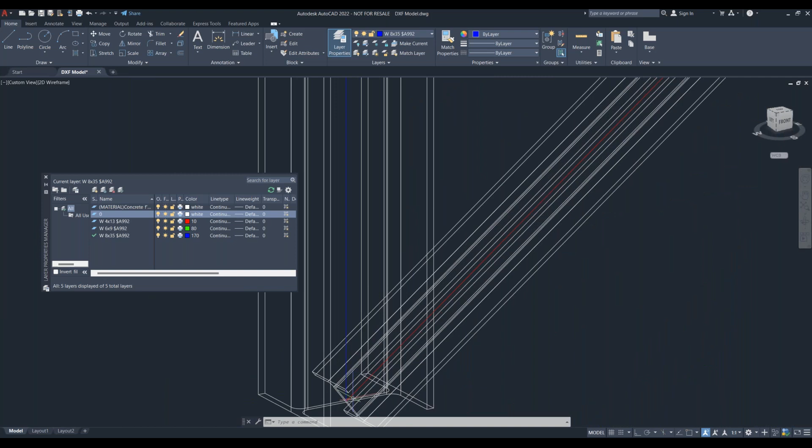Then what I've done was drawn in the analytical lines at the center of all of my members here. Depending on the cross section, I made multiple property layers for each cross section. So here my red cross sections or red lines are corresponding to my red layer, and those are my W 4x13s with the material here. You can see the layer description.

This is the exact format that you have to type your cross-section name in with your materials. First it's the cross-section, then a space, then a money sign, and then the material name. This is very important—your description has to be in this exact format for RFEM to be able to read it and extract that information correctly when importing.

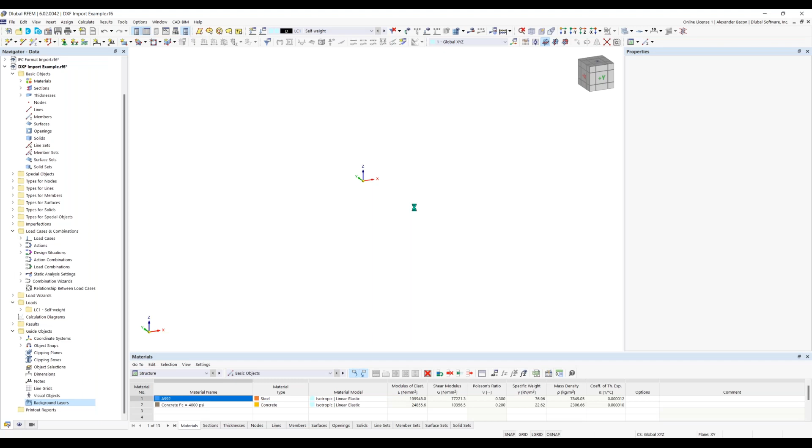So once you have all your layers set up properly like this, you can go back to RFEM. I'm going to delete my background layer here, go to File, then Import, and choose AutoCAD or DXF. I'm going to choose DXF, then choose my DXF file, and hit Open.

Once I hit Open, this dialog box will pop up. Again, you can choose the origin point or rotate the model, flip or switch around or mirror the axes. The most important option to check on is to generate our members and use layer identification. With these options turned on, instead of just generating the lines, I can also generate the sections and materials based on the layer description.

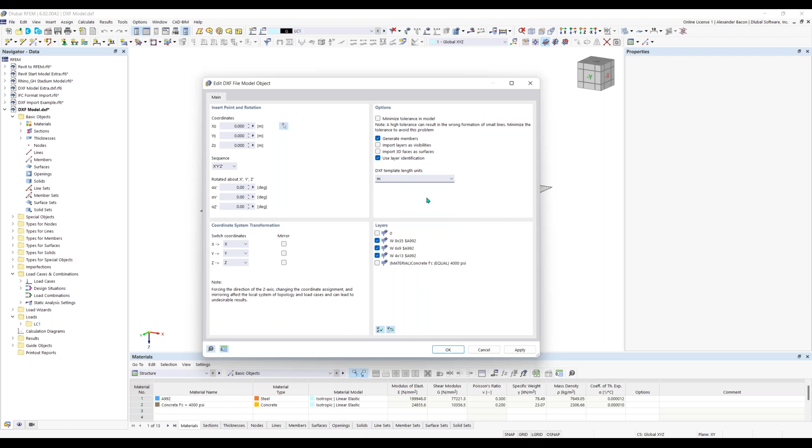Now you can see those layer descriptions down here. I want to check off my member outlines in this layer, and I also want to change my units here. Once I click OK, my conversion tables will pop up, and once I click OK again, you'll see that I have imported the model and it looks really good. I can also check and make sure all of my sections were imported properly, and I have all of my correct W-shaped sections here.

So this is another method for importing a DXF file and modeling it in RFEM, and it isn't suitable for everyone. Since you have to create the analytical lines in AutoCAD, if you haven't already done that, it might be a lot of work, and maybe you're better off modeling them in RFEM. But it might be helpful for companies that use blocks in AutoCAD, if you use very similar structures or the same type of structure all the time. If your blocks already have the analytical lines modeled, this could be a really easy solution for you.

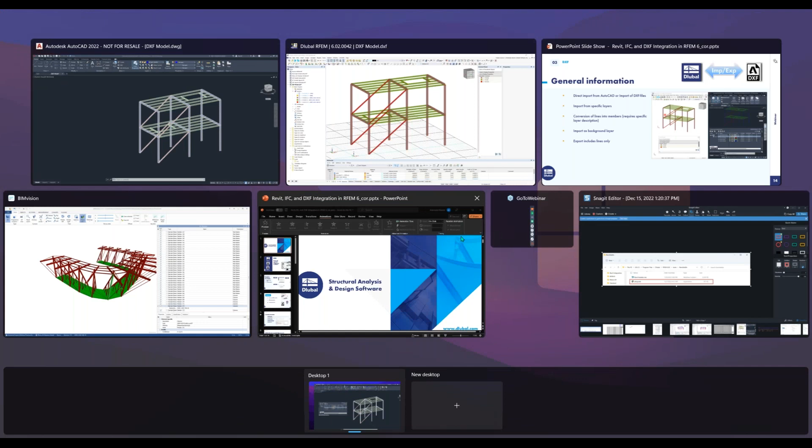So that is all that I wanted to go over for today's webinar regarding the interfaces between Revit and IFC and DXF. And now I would like to hand it back over to Amy to conclude the webinar.